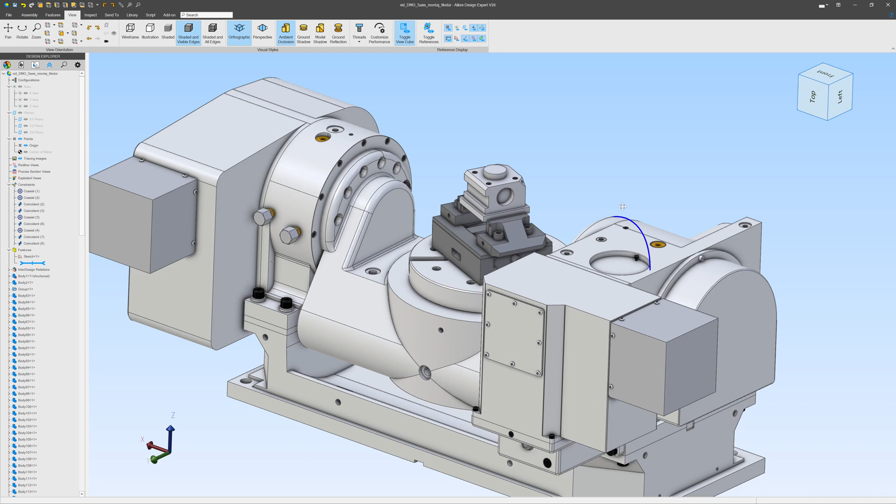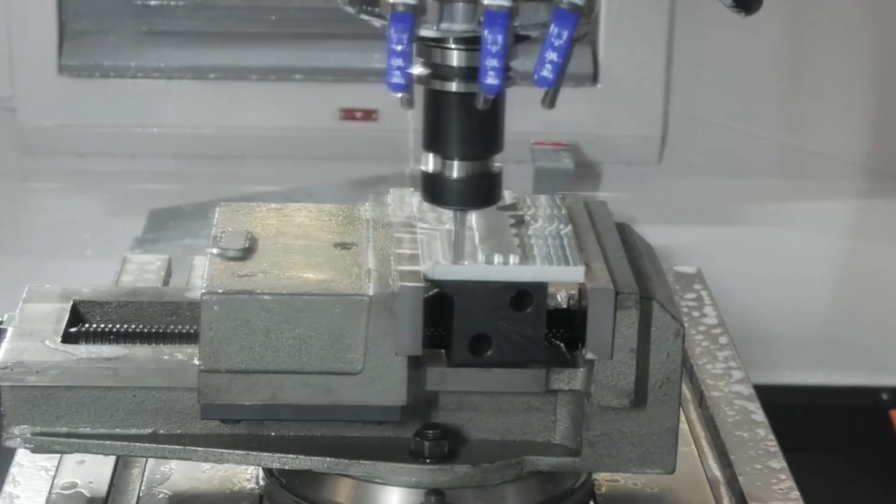In this video, we'll explore how to machine a 5-axis index part, also known as 3+2 machining, using EZ-CAM software. You'll learn how correct coordinates are sent to the machine through the post-processor. We'll also take a brief look at FANUC's G68.2 tilted workplane system to understand both its theoretical background and its practical application. If you're using a standard 3-axis machine, there's usually no need to define a tilted workplane.

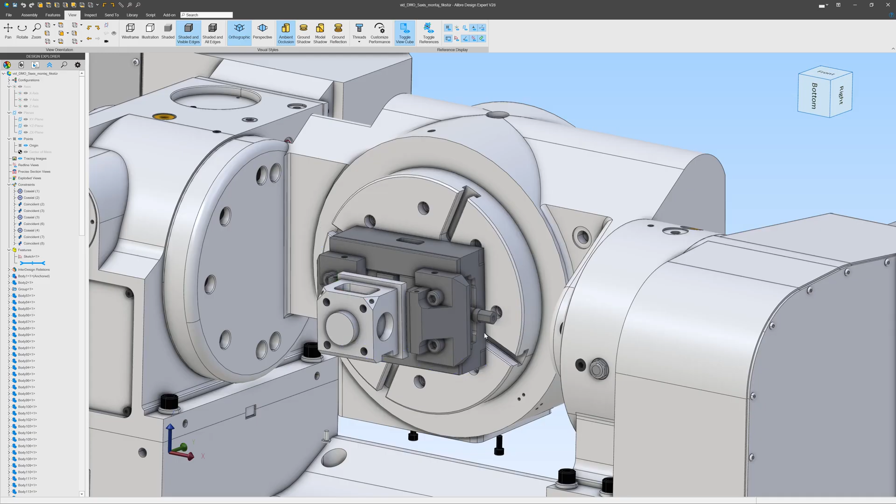But once rotary axes, such as B or C, come into play, things become more complex. When machining different faces of a part, the coordinate system must be realigned each time. In the past, there were two main ways to solve this. The first was to use separate work offsets, like G54, G55, or G56, for every new surface. That method worked, but it was time-consuming and increased the risk of human error.

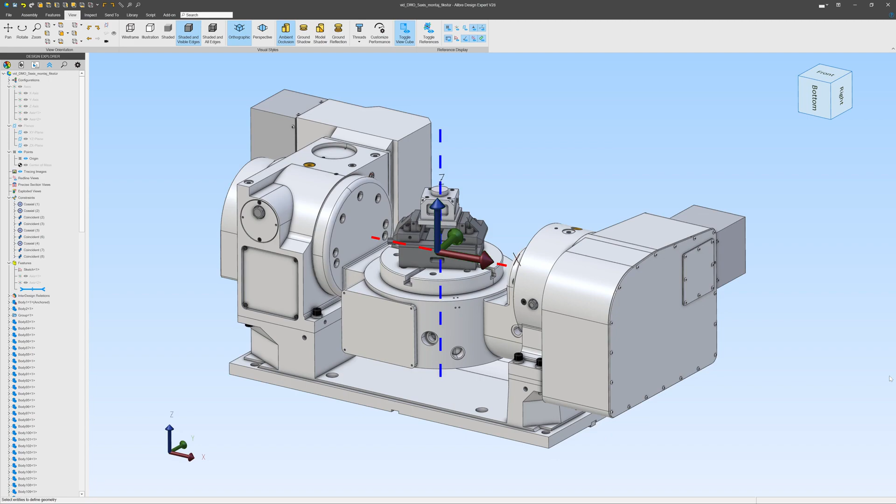The second approach was programming relative to the rotation center, meaning all surfaces were defined relative to the intersection of the rotary axes. This method was more consistent, but even small mechanical inaccuracies or zero-point errors could cause deviations. To overcome these limitations, FANUC introduced the G68.2 tilted workplane command. With this system, there's no need to manually redefine coordinate systems each time the part is rotated. The control automatically calculates and applies the transformation for you.

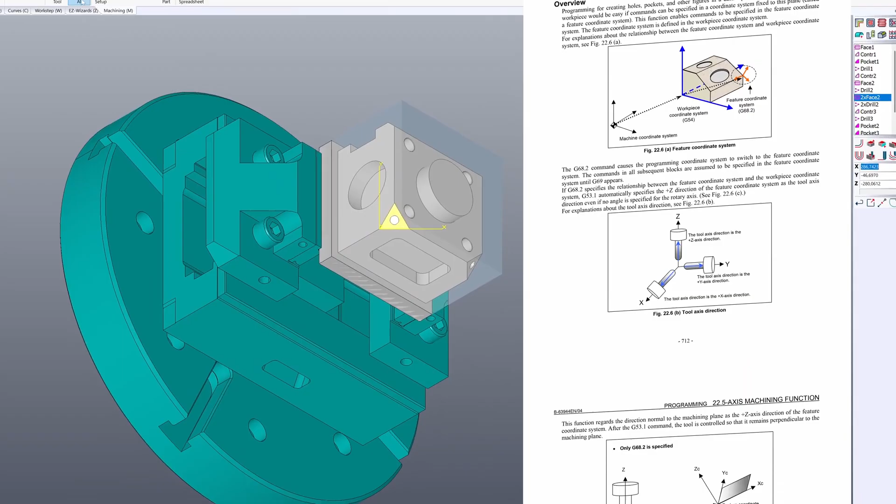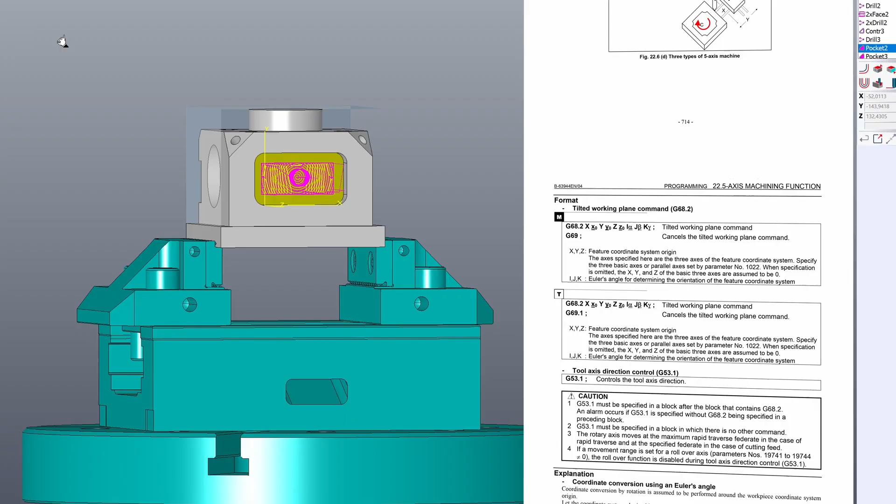Thanks to G68.2, you can program operations on angled surfaces as if the part were lying flat on the table. There's no need for complex trigonometric calculations. Toolpaths are applied directly and accurately to the tilted plane. You can choose any point, on or near the part, as the rotation origin. The control system automatically calculates all required rotations and coordinate transformations. As a result, you can program even complex surfaces as easily as flat ones. There's no need to manually reset tool zeros or work offsets. The control takes care of everything.

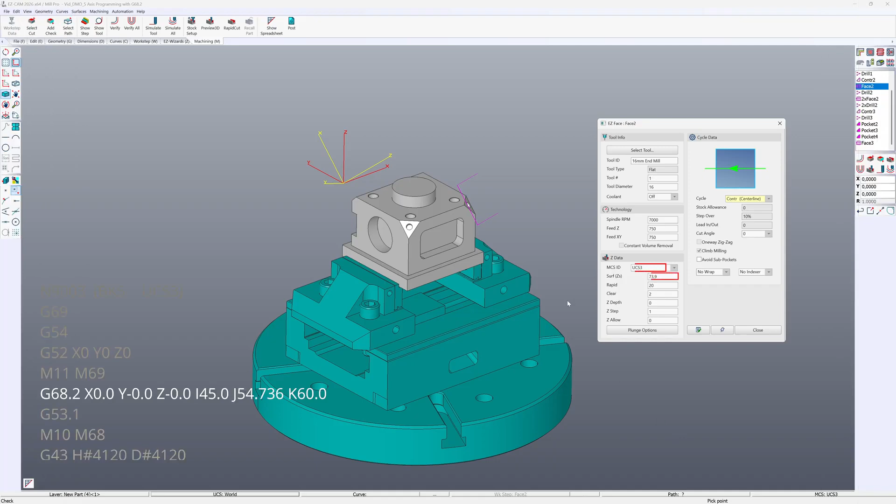In this section, we'll show the predefined UCSs, or user coordinate systems, prepared on the part. These UCSs correspond to the various sides and angles used in the following operations. Let's take a closer look at the command structure. The X, Y, and Z values define the pivot point or rotation center. In most cases, they're left as 0, meaning the rotation center matches the part's origin, but they can also be placed anywhere, for example, at the center of a face or a hole.

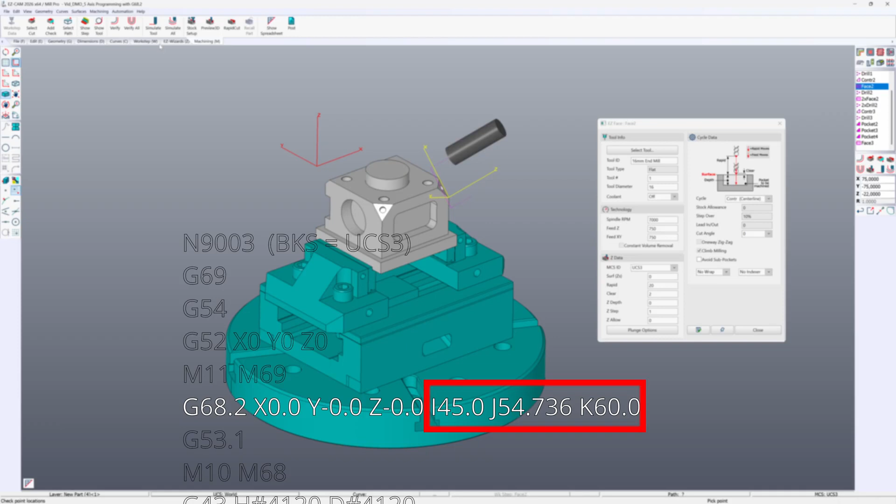The I, J, and K parameters define the orientation of the new Z-axis, the normal vector of the tilted workplane. In other words, they determine how the new machining plane is positioned in 3D space. These values are computed by EZ CAM according to the desired Z-axis direction of the tilted coordinate system, following FANUC's Euler angle rotation sequence. For example, one tilts the plane 45 degrees around the X-axis. Another first rotates 30 degrees around the Z-axis, then tilts 45 degrees around the new X-axis.

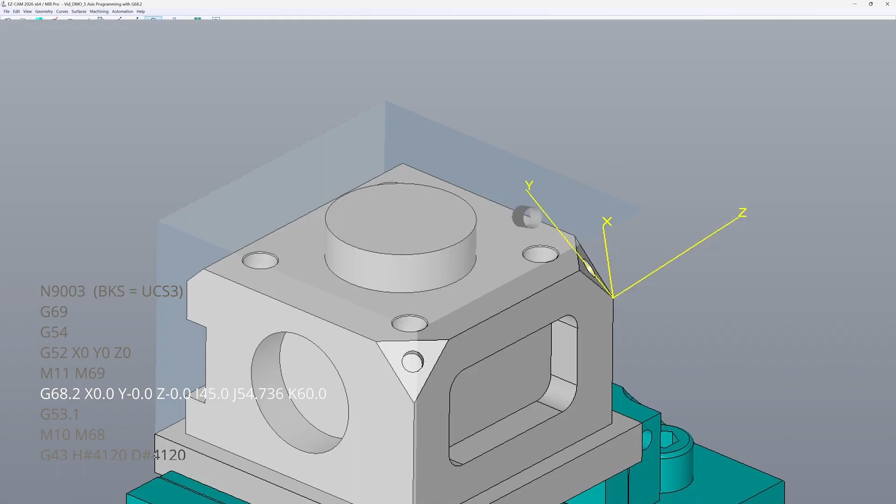The control automatically calculates the corresponding angular transformations based on the machine's kinematics and commands the rotary axes A, B, or C to achieve the correct alignment. This eliminates the need to manually specify individual rotary motions. You simply define the desired plane orientation, and the control handles the rest. Now let's take a look at how the operations we see on the screen are created.

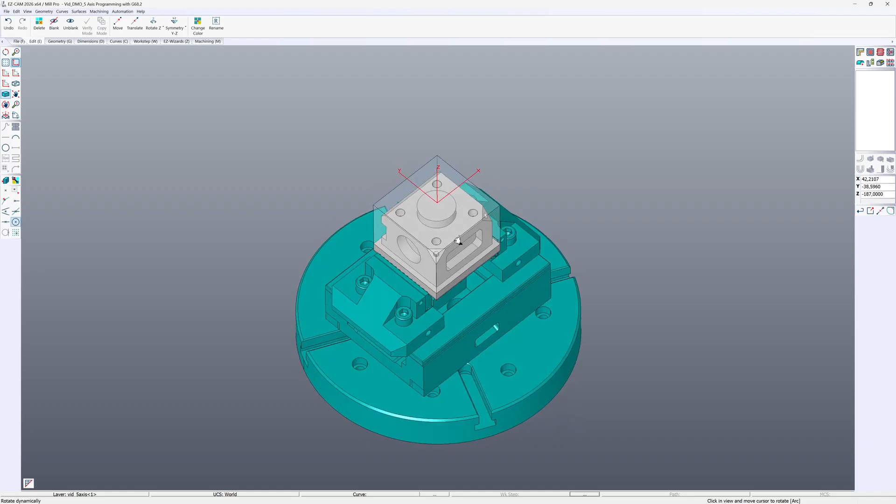We start by placing our main coordinate system, or world, anywhere on the part. Using the coordinate system by geometry command, we define the X and Z directions by selecting surfaces and edges. Then through the world UCS on model stock interface, we can easily move this coordinate system to any position on the part. In 5-axis index machining, the main difference from 2.5D or 3D operations is simply the need to create additional coordinate systems and select them within the operations. We'll use the main coordinate system for operations like facing, contour profiling, and drilling on this plane.

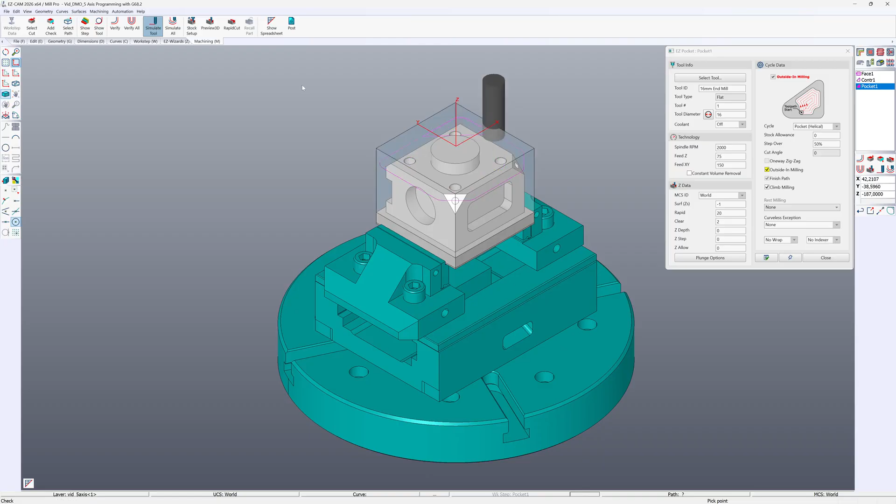Next, let's machine the chamfers at the corners using a centerline pass with the selected tool. For that, the surface must be positioned perpendicular to the Z-axis, allowing us to use the flat bottom of the cutter. So we'll create a new coordinate system for this orientation. The name we give this UCS doesn't matter technically. What matters is that it's positioned correctly.

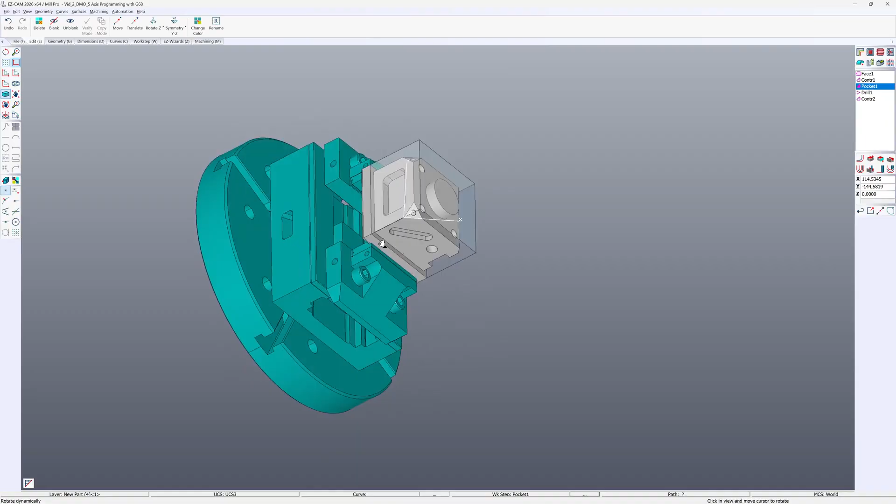Now, should we place this new coordinate system at the same point as the main one, or directly on the surface we'll machine? In fact, both approaches work equally well. The G-code will include the positional difference between the main and machining coordinate systems automatically. So you can place the new coordinate system anywhere, as long as its Z-axis orientation is correct. Let's continue by placing it on a convenient spot near the region to be machined.

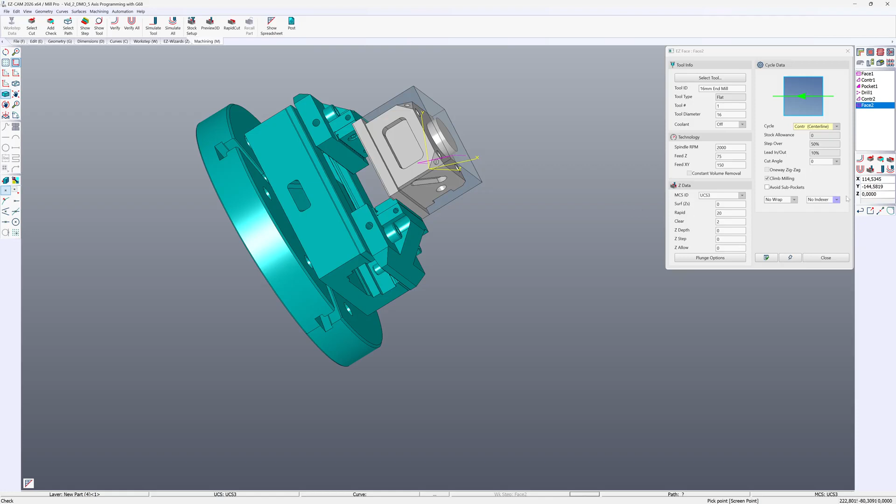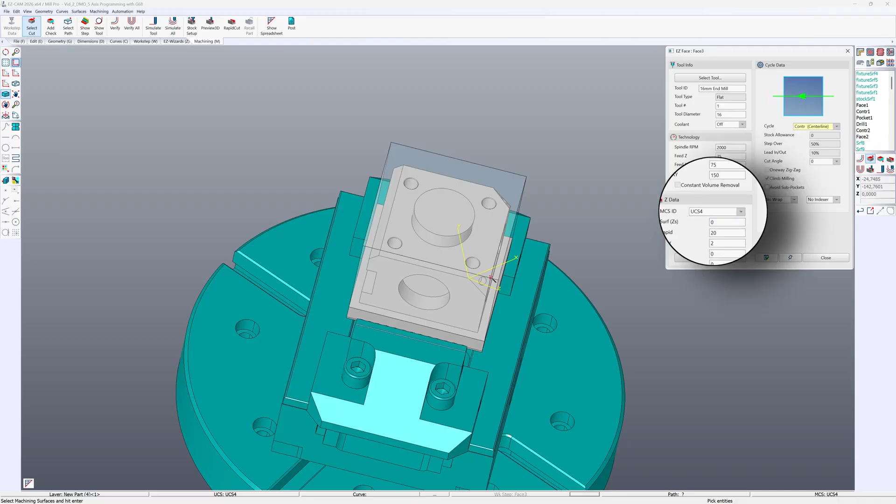For this corner, since the tool diameter is large enough, we can perform the operation with a centerline pass. Inside the face operation, simply enable the centerline cycle option and select the surface you wish to machine. Important note: when you look at the MCS ID field, you'll notice that the program automatically assigns the currently active coordinate system whenever a new operation is created. Of course, the user can always select a different UCS manually from the drop-down menu if needed.

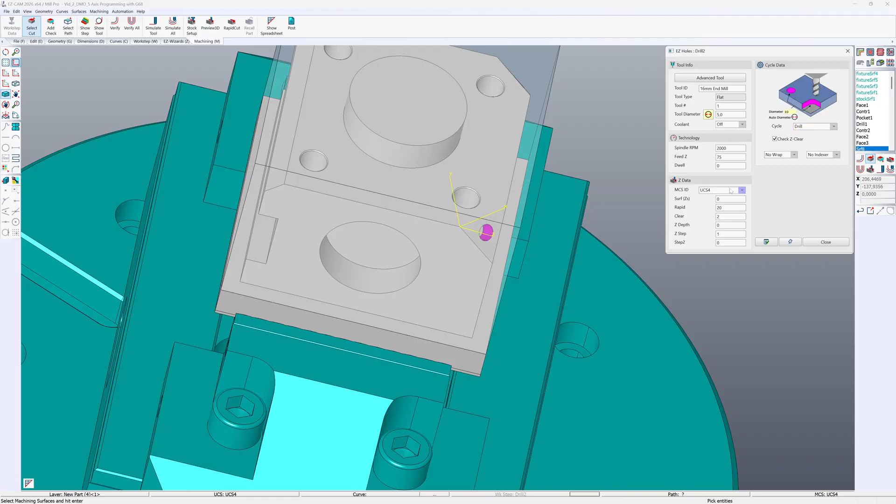We then repeat the same process for all other surfaces that require machining at different orientations. As you can see, indexed 5-axis programming in EZ CAM is straightforward. All you need to do is create new coordinate systems to view each region at the correct angle, and the rest follows the same standard operation steps you already know.

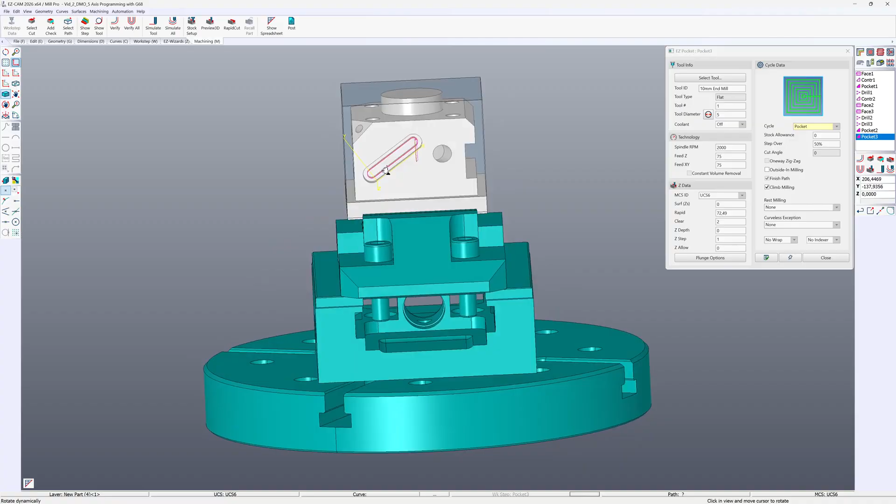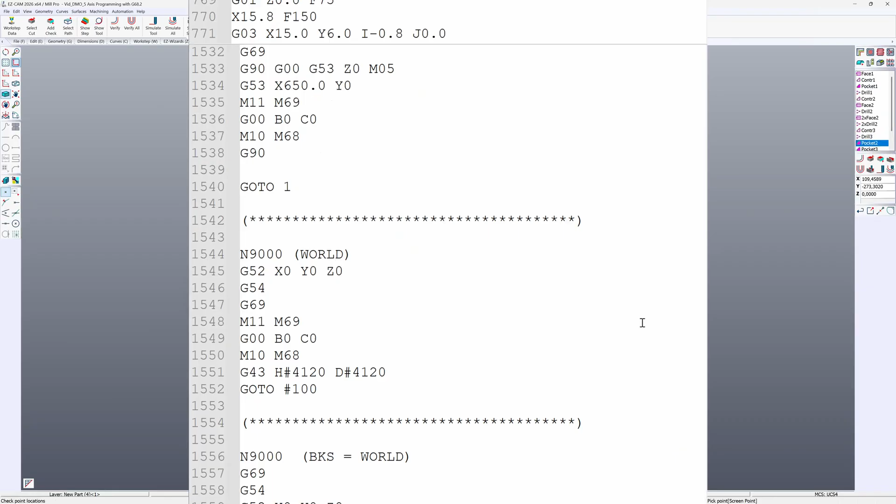After reviewing the simulation of all operations, look at the G-code output. You'll see that in the program generated for the FANUC Robodrill D21LiA5, all plane rotations are correctly handled by the G68.2 command for each setup.